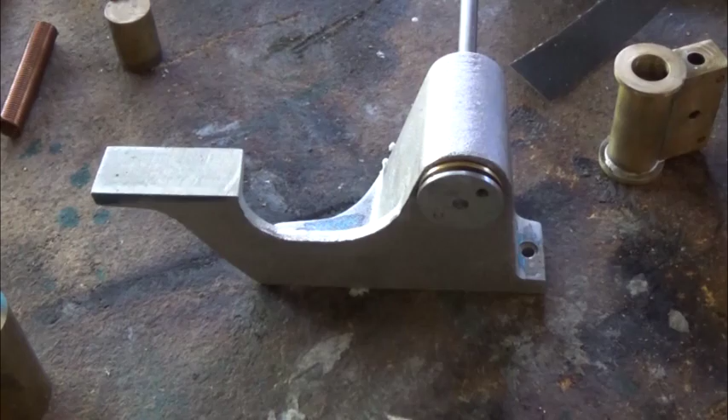It's the weekend again, we better make some bits for this engine. I've been dragging my feet a bit on this because I've got a fairly major signwriting and art project in progress, and I can't show you any of that because it's part of a swap, and it's supposed to be a surprise for another month, so I've taken some pictures, but you'll have a look before we send it away.

The other reason is that it's been cold. It's freezing here overnight. We've got the heater in the workshop here, and I don't feel a whole huge amount interested in coming in here after work, and it's been a busy few weeks. We've got a trainee and a few things, and making lots of bits for this.

So anyway, it's Sunday morning, or Sunday afternoon now. Laundry's done, dishes are done, dinner's on, and it's time to make some bits.

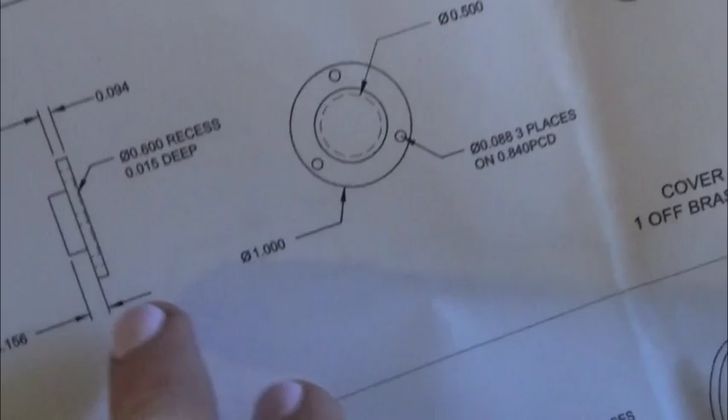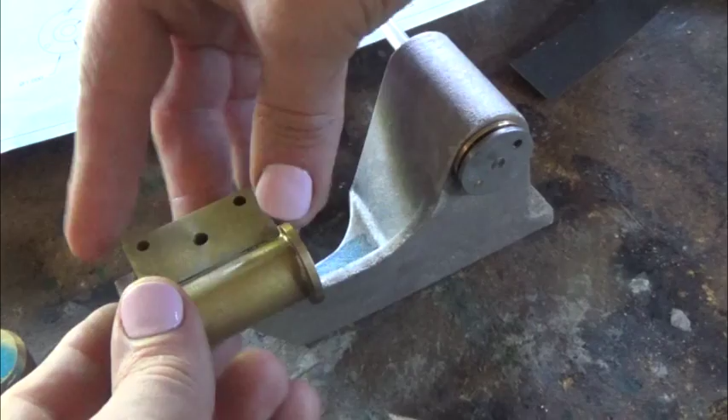So there's a few fairly simple parts for this cylinder assembly to make. Have a look. The first one is the back cover and the front cover, which has got a reamed hole through it, and a bit of a step for a gland. This bolts on here eventually, and the excess there is trimmed off, but there's a cover's got to go on the front and a cover on the back, and there's a piston goes in the middle, so pretty straightforward.

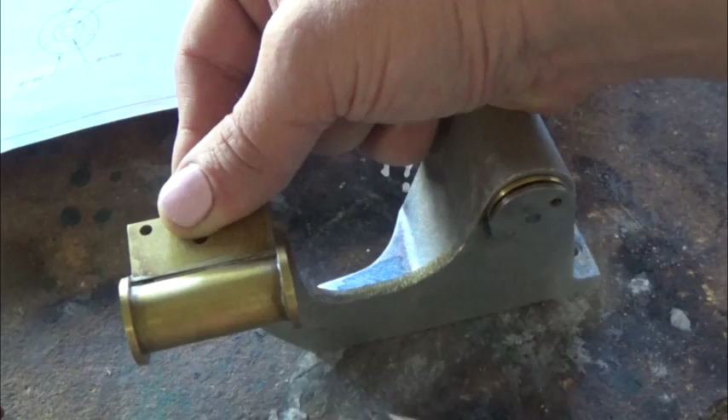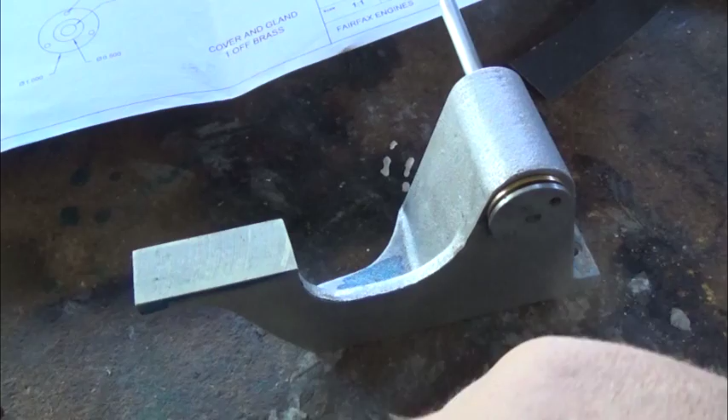These have got a hole tapped here, and one here and one here. We're probably going to mark the 3 holes out in the dividing attachment and the dividing wheel in the lathe, and then drill them, spot through these and drill these and tap them to fit that.

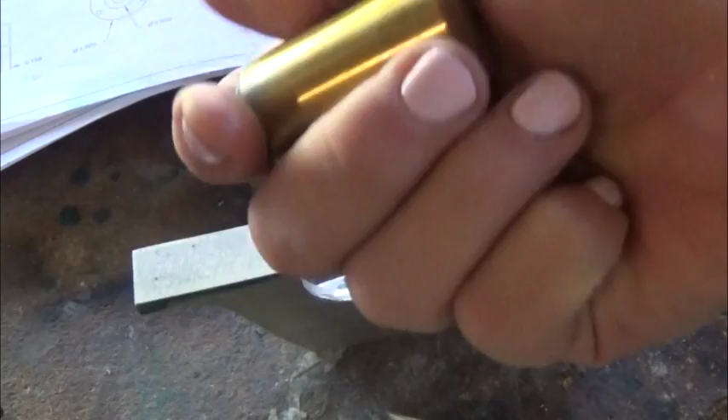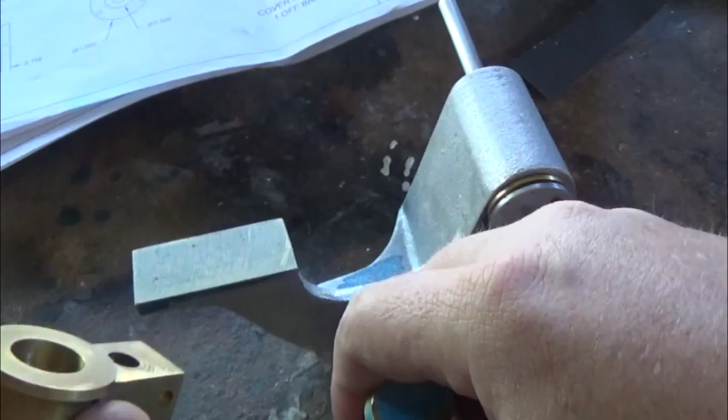So let's go ahead and set this up in the 3-jaw, face him off, machine the spigot to go in the end of the cylinder nicely, and part him off and turn him around, machine the back, mark the holes, drill him.

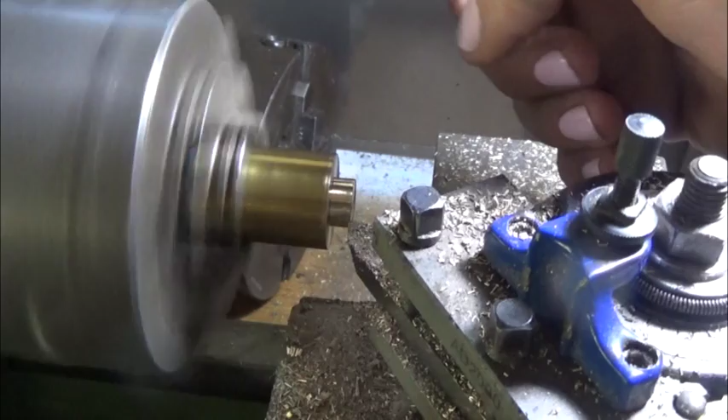So I've set this up and machined this step on here. It's a nice fit. It doesn't want to be sloppy, and it doesn't really want to be a push or a press fit because you'll score the bore. But this is a good fit. It's still a little bit long there, so the last operation on this side is to machine this down to 3/16 long, so that's the next job.

Just check it as we go. And always stop the machine. And on the last cut, it's a good idea to back this tool out too, so that you're not leaving score marks as you come back. And that's going to do for that side. Just going to break the edges, polish the outside here, part him off.

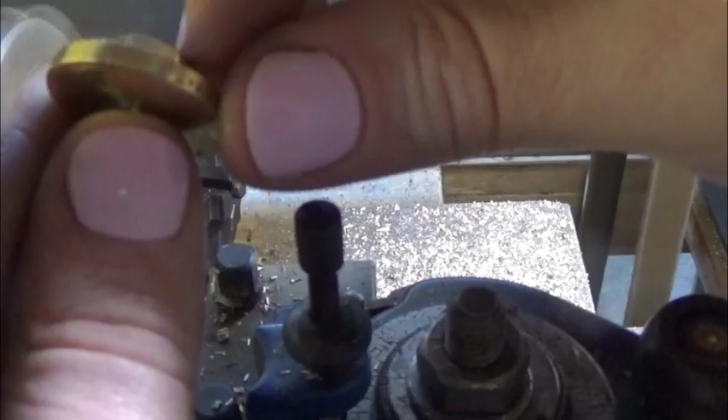That's one cover. Hold him in that end and machine a bit of a land on there and mark the holes out. But before we do that, we've got to make another one that's exactly the same, with one difference: it's got a reamed 1/4 inch hole through it. So I'll do that.

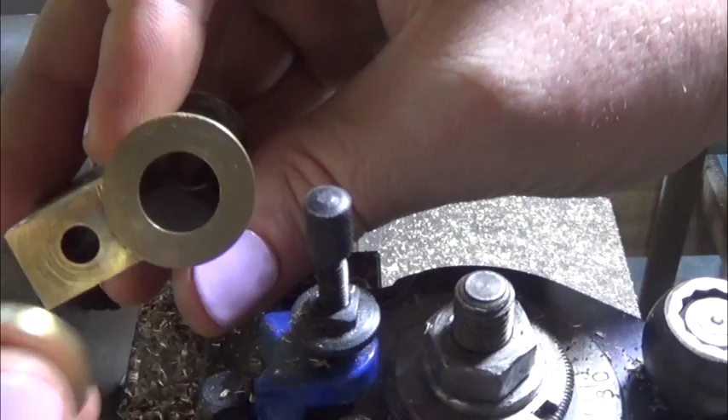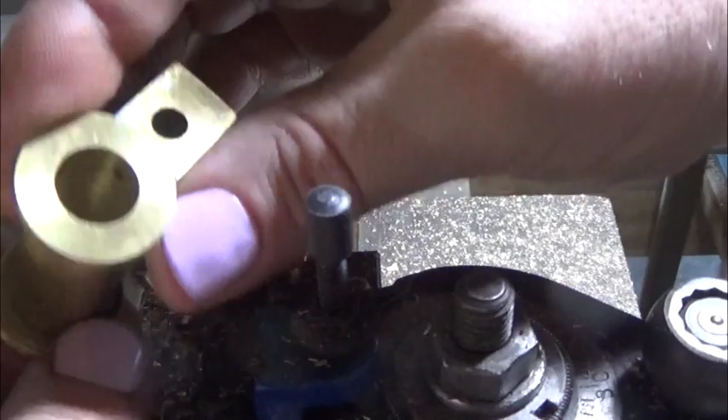So there we go, there's the back end cover. It's got quite a lip there, but this hole's back nearly 3/16 of an inch, so that puts it all in the right position. You can see the hole in there just, and this one comes through here. We've still got to clean the outside out.

That's the 2 covers. So next job's to set these up nice and gently, perhaps with a little bit of glass paper in there, just so we don't have to grip them very tight. This one's just machined down to 100 thou here - well, 93, that's 3/32. And this one the same.

Let's put a little bit of a decorative piece in there. But we've got to mark the PCDs on there, just 3 places, all ready for 3 8BA screws.

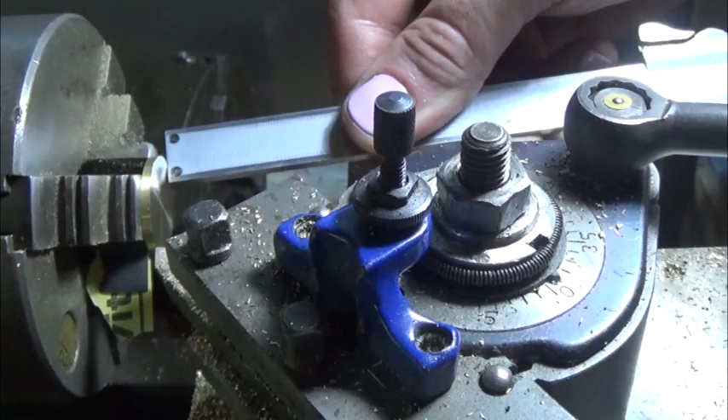Have a look, that wants to be quite a lot shorter there yet. Again, these probably aren't that critical, these measurements, but they want to both look the same on each end of the cylinder. So they're both down to the same thickness, or they should be.

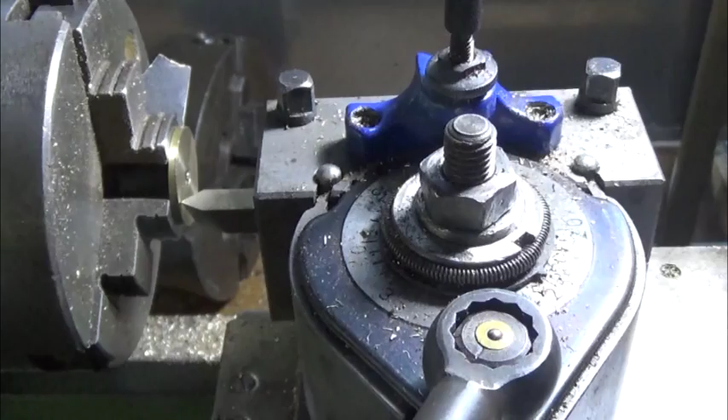The next operation here is to mark the PCD, the pitch circle diameter, the centre circle of the mounting holes. Myfordboy has put 3 bolts on an 840 diameter. This is 1 inch diameter, so it's 160 thousandths of an inch shorter, which is 80 on each side, which is basically 2 millimeters on this machine.

So I've set this up, the tool on the outside diameter here, right nice and close, as good as I can see, with a loupe. And I've gone in 2 millimeters, zeroed the hand wheel, and gone in 2 millimeters, so that's pretty straightforward. I'm going to do both hand wheels at exactly the same setting, so both end caps are at the same setting. There, just touching.

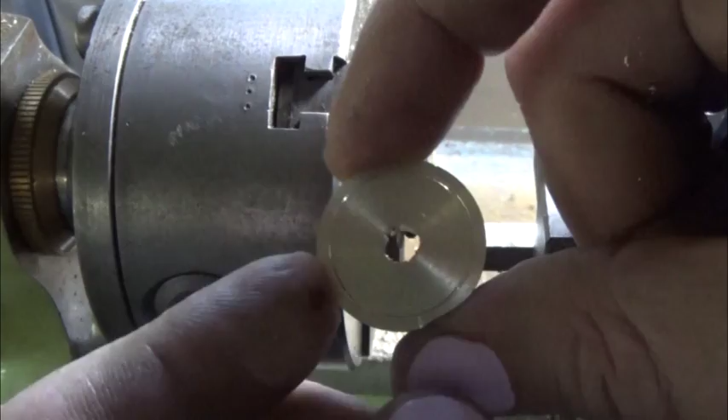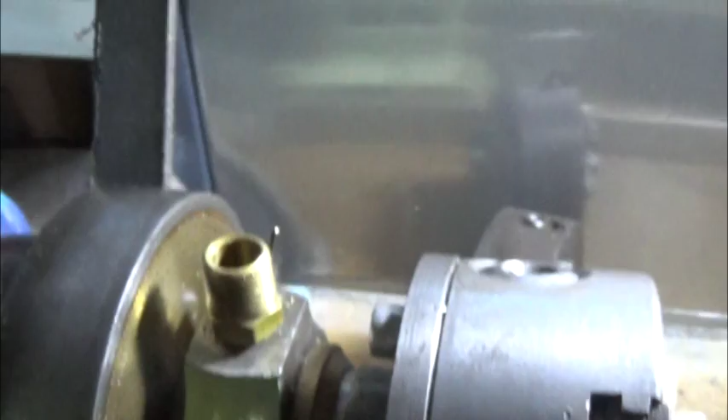Swap them over, do the other one. I've used the indexing pick at the back here with the motor turned off. Very difficult to get a good shot of the back of the lathe here, but there is an index pick that works in this wheel. There's a 24 pitch circle, so I've just gone 8 teeth, or 8 holes, and then 8 holes and 8 holes, and marked the points like that. This one's the same.

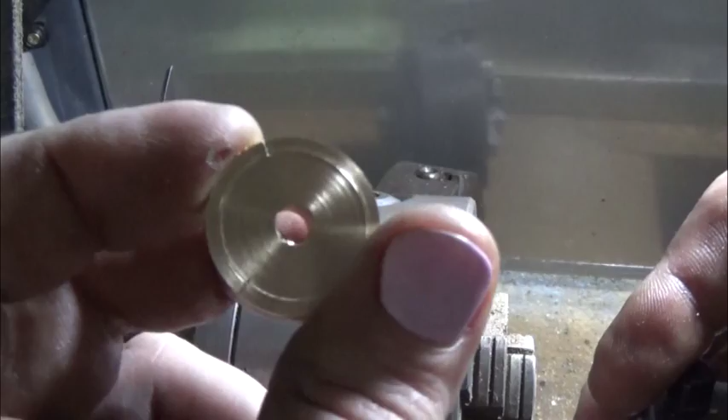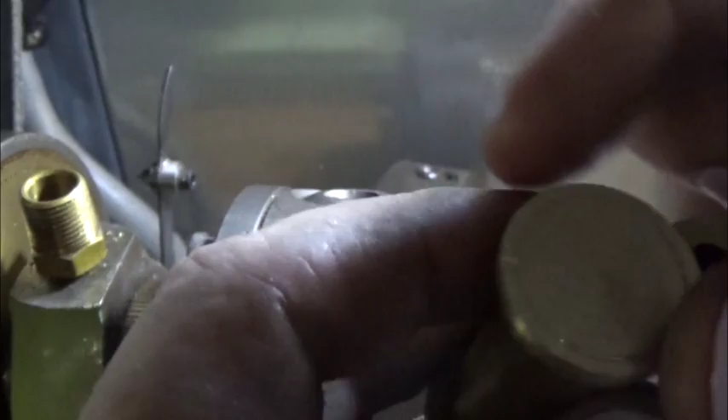Put a centre punch in the 3 holes, drill them, and we'll clamp them up on the job so that they're nice and square on there. That hole there has got to be pretty square onto here. And just spot them gently.

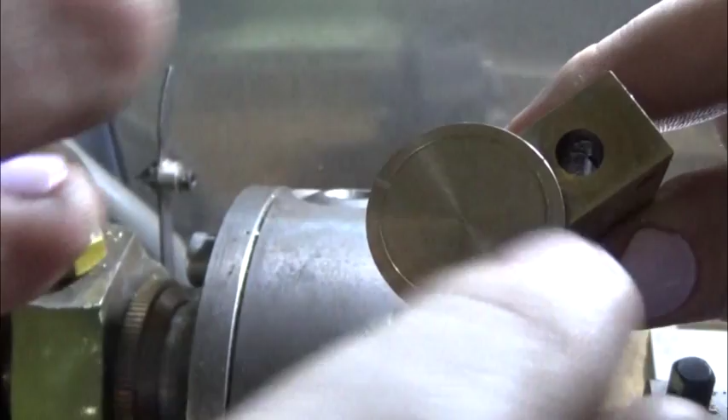Take these off. These are still got to be finish cut, so we're going to put a fine finish on them, and that's going to be the covers pretty well done. So there we go, they're all tapped - they're 8BA, which is not a very big tap. And they're bought bolts, which are really nice, they're hex head.

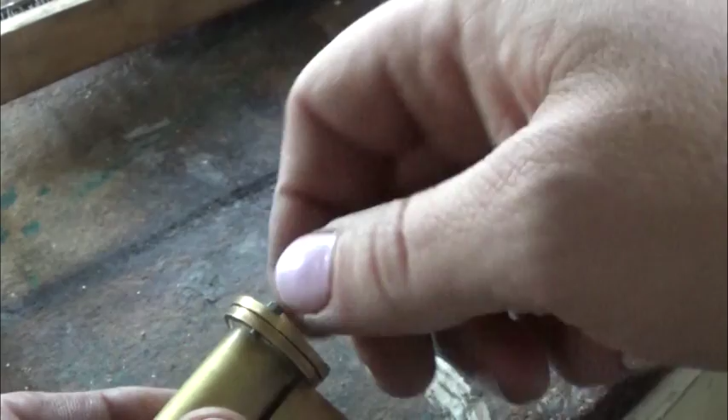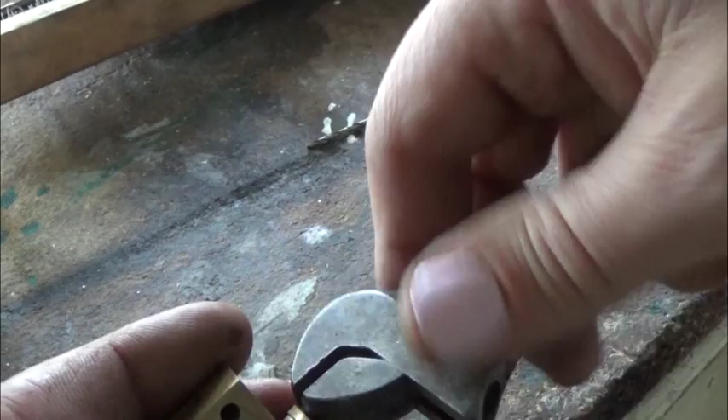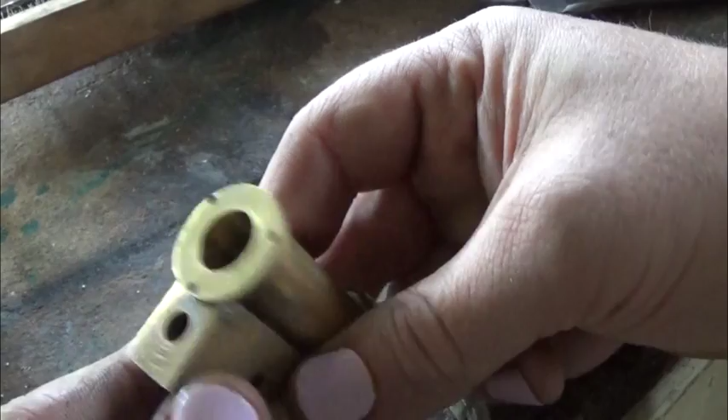I haven't filmed doing this, and I feel a bit like it's kind of a catch-22 situation. I don't want this engine build to run into 61 parts and be long and slow and boring, but I don't really want to miss some interesting parts of the job either, which is this particular one. What I've done, I'll just explain this.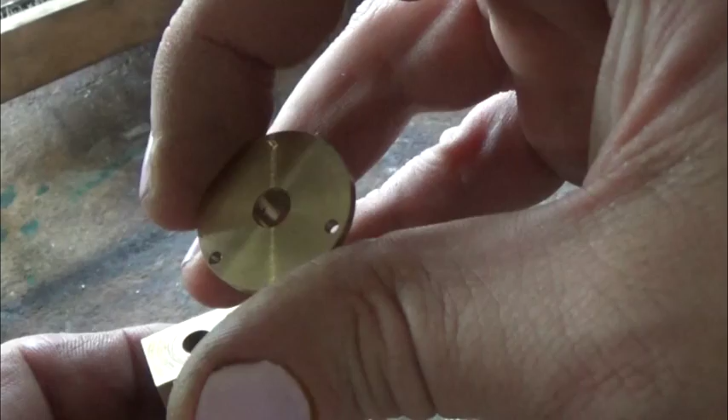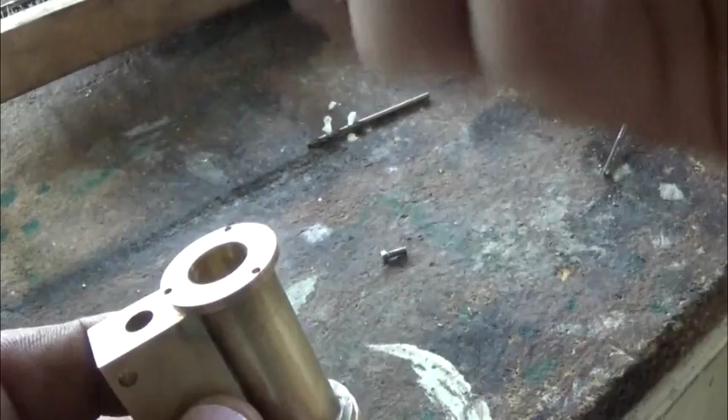I've drilled these to tapping size first, then sat that on there and clamped it, and spot drilled them, just touched them so that you've got marks, and then drilled the 3 holes, which is pretty straightforward. Tapped them and drilled this out afterwards, so they do only line up one spot and they're not out very much.

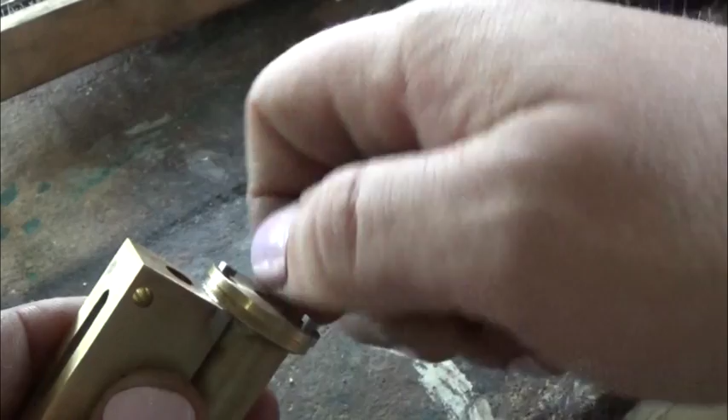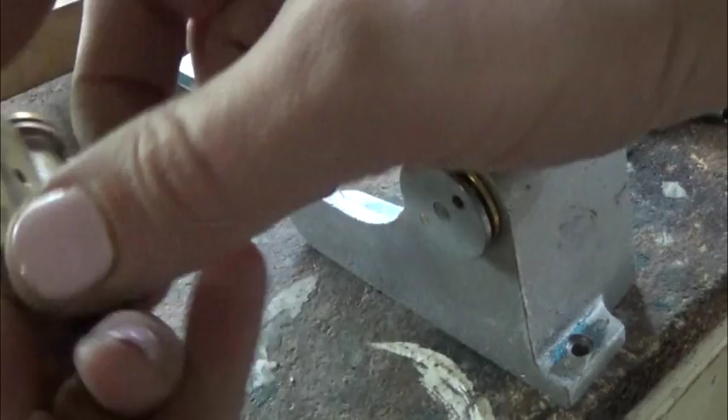Next job, I guess, is a cover for here, which is pretty straightforward, and I'm going to do that with the shaper, I think. Just by way of interest, it'd be a very easy part to do in the 4-jaw chuck, but I might just do him with the shaper. It's pretty straightforward.

And about all we've got to do then is eccentrics and rods, oh, and some pistons. So there's not much more to do on this engine - we better get in and get it finished. But that's what that looks like. It's a bit top heavy. Without some bolts in it, it's not going to sit there particularly well.